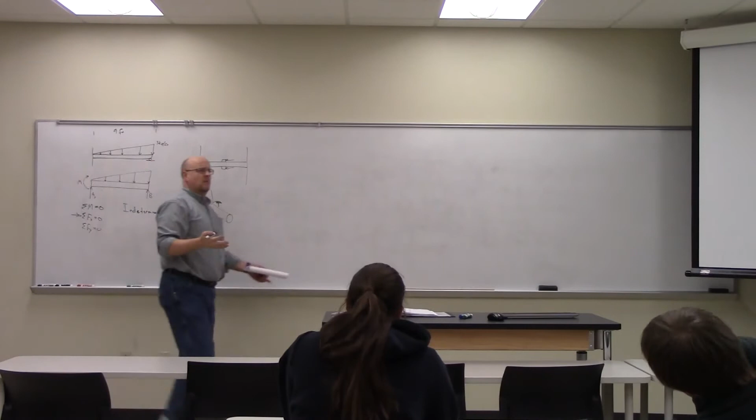Huh. I've never had that happen.

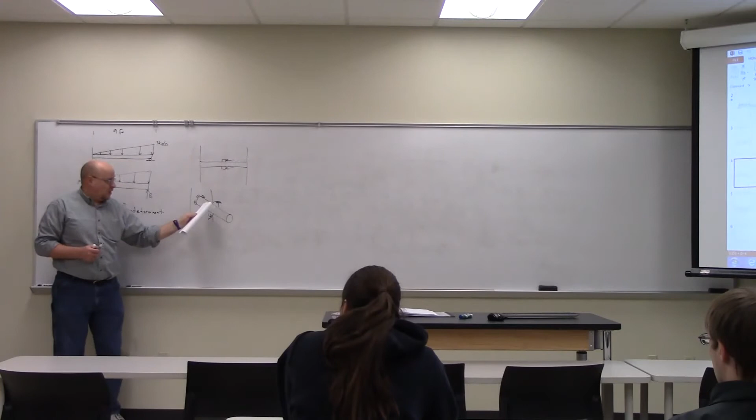And here we have an indeterminacy in bending. In each case, we use material properties. Here, we used the fact that the displacements at the ends were zero, so the total strain of this end relative to that end was zero. We added the strains. And here, we added the twists. We knew both ends were fixed, so the total twist was limited. We looked at the constraints of twist. Here, we're going to do the same thing, use the constraint to solve the problem.

Woo! Man, I was in the last... Okay.

So, what would our elastic curve look like for this? Parabolic? It would not be parabolic. What would it look like on the left end? Kind of slowly sinking? At the very left end, it would not be slowly sinking. Zero. Right, it'd be a slope of zero. So it has to come straight out at this end and then dip. Isn't the dip centered more towards the right side? Yeah. Maybe it is.

Now, we don't know necessarily where the dip is centered, but the left-hand end we know is straight. And the right-hand end we know has no deflection. So in this case, we now can't solve for Ay like we could last time. Last time we knew what Ay was.

Right? Because we knew it was the only reaction force that had to equal the total downward force. But now we have a distribution between AY and B. So now the moment at some point along here, so now we do a section analysis. We have AY pushing up here. Let's call it A. There's no X. We have A pushing up here. We have the ramp pushing down here.

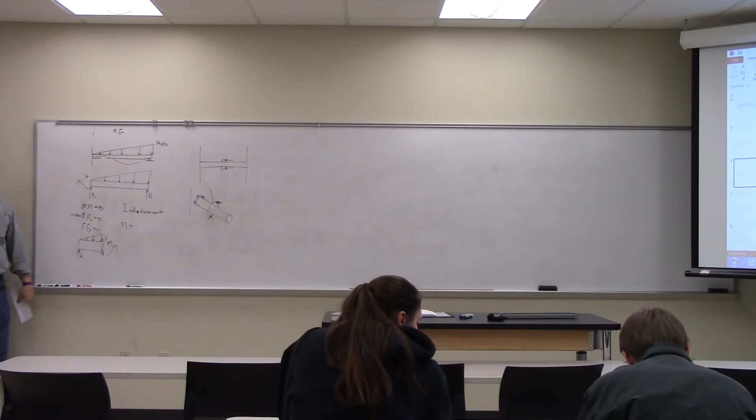So then we have V here and M here. Right? That's what we had. But now, instead of having a number for A, we have an unknown for A. So our moment expression, I think I got it from last time. What was our moment expression? Right, it was 3 over 9 times X times, give me the whole expression again. 13.5x minus x cubed over 81. That's supposed to be 18, I think, minus 81. Minus 81? Yep. And now instead of 13.5, we have AX, or A.

Right, the reaction force at A. So we have an additional unknown. Then we go through and we do the next step. So EI dV/dx, the integral of this, right? So we'd end up with AX squared over 2 minus x to the 4th over 72 minus 81x, right? Whereas last time we had 13.5 here, divided by 2, now we have A. You follow the process? And then we get to the other one.

What was our EIV? EIV was equal to, now it's going to be A over 6 x cubed, right? Minus x to the 5th over 360 minus 40.5 x squared plus C1 times x plus C2. There's our expression now. Okay. So now, all we've done is in order to remove our indeterminacy, we've incorporated one of our redundant unknowns into the expression.

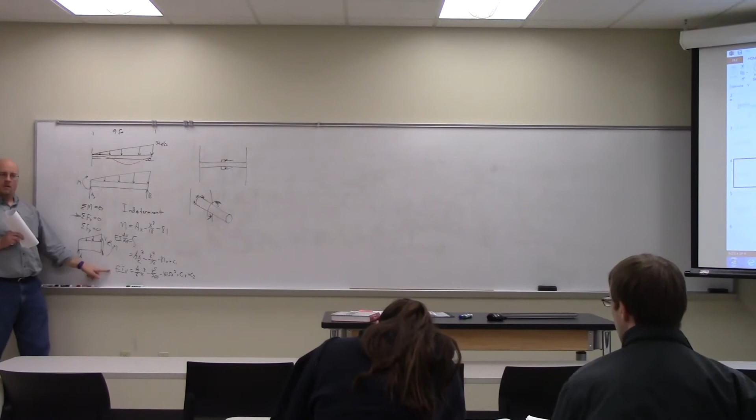But now we have to have a 3rd constraint. What's our 3rd constraint? v of x at x equals 9. It's the thing that we added that is our now redundant or indeterminate constraint. So by adding the indeterminate constraint out here, we've added another constraint in the equations: at x equals 9, v equals 0 as well. So I set this bottom equation equal to 0 at x equals 9, and then I can solve for A. So we use the same beam deflection process to also solve for indeterminacy.

And if we had an additional constraint, let's say I put another roller in the middle, I would now have an additional unknown, a C, pushing up here, but I would have an additional constraint to use to find this. Does that make sense? So we only have 2 equations? Yeah, I'd have these 2 equations, which would involve an A and a C, or actually by putting an additional constraint in the center, I would have to do an equation with an X coming in from this end, because I have to break the equation in the center. You know what I'm talking about?

So the point is, I would still end up with equations. I would still know my C1s and C2s from the other constraints, and then I would be able to solve for my A and C in this case. The more constraints I put in, the more complexity. But for every constraint I add, I get a constraint that helps me solve for yet another variable. Okay, does that make sense?

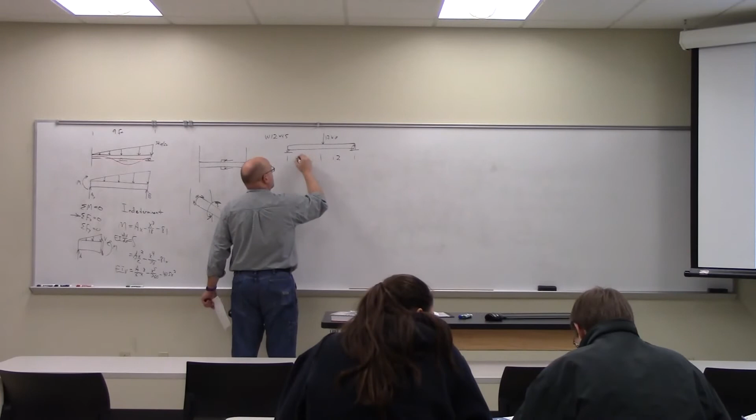And a W shape, pinned at one end and rolled at the other. We have a 12 kip load applied at the midpoint. And we have a moment externally applied here at the end of 50 kip feet. And these are A, B, and C. Okay. W12x45, made of A36 steel. Subjected to that loading, determine the deflection at its center C.

So what are we going to do? Free body diagram, all right, the free body diagram. 12 kips there. What else do we have? Reaction forces. A_y and B. We actually have the 50 kip feet out here. Okay? What do we do now? We can do our final reactions. Okay. So anyone find the reactions? You already know the reactions, right?

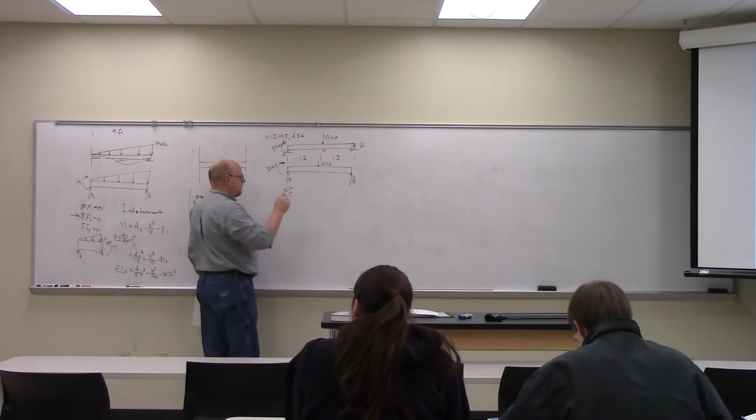Well, the force is applied in the middle, so we know that A and B are just both 6. No, there's an additional moment. If you were to do summation of forces in Y, you can do the moment, and I say we sum moments about B. Okay, so that doesn't get us A or B. Kayla suggested we do moments about A, and somebody over here suggested moments about B. I'm going to suggest we go with moments about A, just because the way it's drawn, it makes it a little more conceptually simple. Because then you don't have to add in the 50 kip moment. No, I still have to add in the 50 kip moment because it's an applied moment, no matter where it is. Oh, okay.

So, do we even need to do the reaction forces for this? Can we use appendix C? Okay. So, it's two different questions. First of all, do we need to do the reaction forces? Why would we not need to do the reaction forces? Well, if we are using appendix C. So you're both saying the same thing? Yes. So, we could indeed just go right to appendix C. Look at appendix C, because this is a simple beam, right? Simply supported beam.

That's the first one. So if you look down a simply supported beam, you have a variety of different loading configurations. Is this a loading configuration that's shown? Yeah. Which one? The very first one. No, it's not the first one. It's a combination. It's a combination of which two? First and the third one. It's a combination of the first and the third. See that? So in fact, we don't really have to go through the whole process, free body diagram and all that kind of stuff. We could skip to the end. Skip to the end.

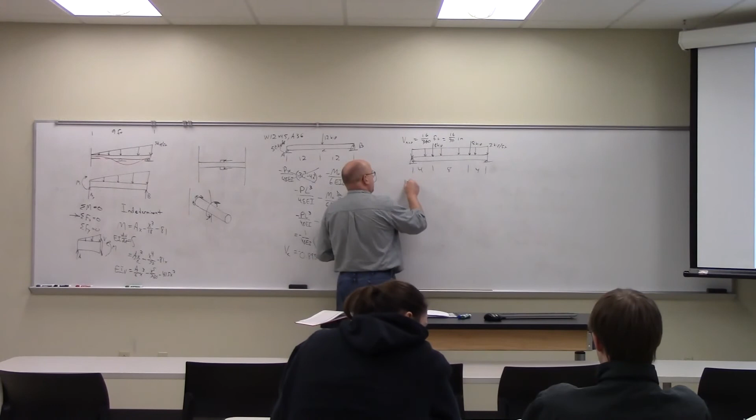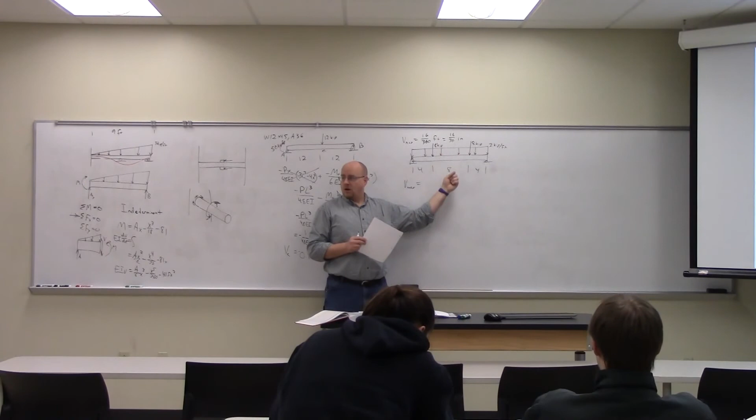V is going to be minus WX over 24 EI times quantity X cubed minus 2. Hold on. For the distributed loads, oh, V max. Okay, I'm sorry. Where's the maximum gonna occur for all of this? In the center, right? Because of the symmetrical loading of the 8 kip things, we are gonna end up with the Vmax being at the center. So we only need to concern ourselves with the center.

What's the center Vmax for the distributed load? Minus 5 W L to the fourth over 384 EI. Where W is 2, okay. What is the deflection caused by the individual loads? Negative P, okay, I guess we'll do the left one first. The negative P, where B is equal to 12 feet, times X over 6 EI.

Hold on a second, what did you say? It was 3B times A? Right, because B is 3L over 4, 12. A is L over 4. Oh, you're putting it in terms of the total length. Okay, and you'll see why I want to do that in a second. There's no A reference though. A, B, yeah. Oh, you're doing the elastic curve.

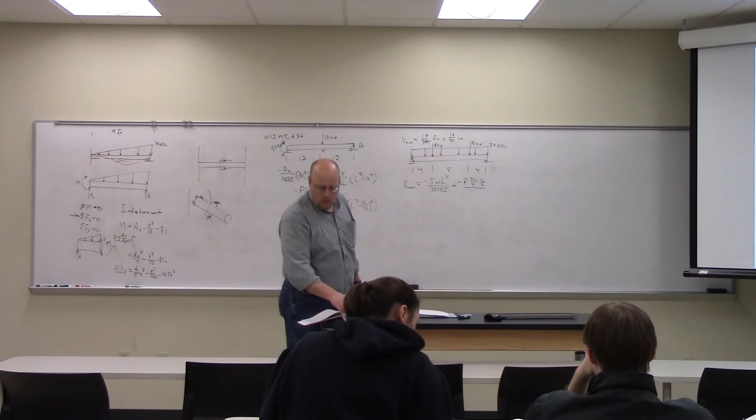Wait, you wanna do the deflection though? You wanna do this one, B and A. No, that's fine, he's doing the right thing. Okay, but I was just reading you the elastic curve for the other one, and it was the wrong thing. For which one? For the distributed load. Yeah, but it wasn't the wrong thing, but we know where the max is, we go right to the max.

But the max for this loading is going to occur here at X equals A. It is not going to occur back here at the center. So we can't use the max loading for that. Does that make sense? Yep. So what do I have? B times X, and X, where we're concerned, is L over 2. Divided by 6 EIL times the quantity L squared minus B squared, where B is L over 4, and minus X squared, where X is L over 2.

B actually has got to be L over 4. Right, because these are only valid between the end and the point of application. They're only valid for x's less than a. So is this one for the left one or the right one? This is for the right one. B is this piece. A is the piece over here. So we have to plug in L over 4 for B.

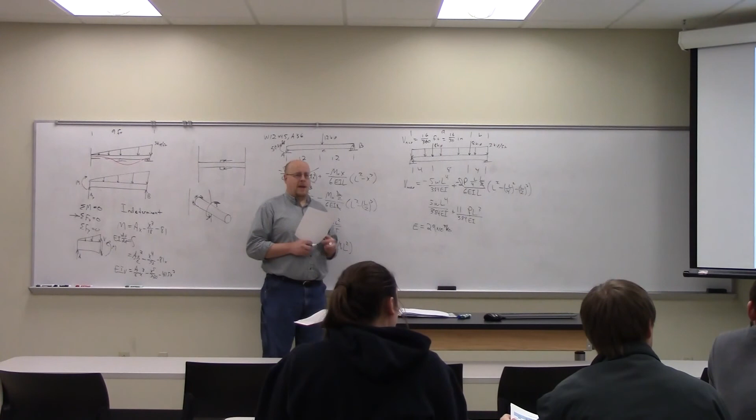So, if we find the maximum moment, we can find our S, and work backwards from the S. So how would we find the maximum moment? Take the second derivative of this expression with respect to, well, actually it wouldn't be this expression, it would have to be the actual elastic curve expression. So we wouldn't have wanted to equate to Vmax, just want to find the elastic curve.

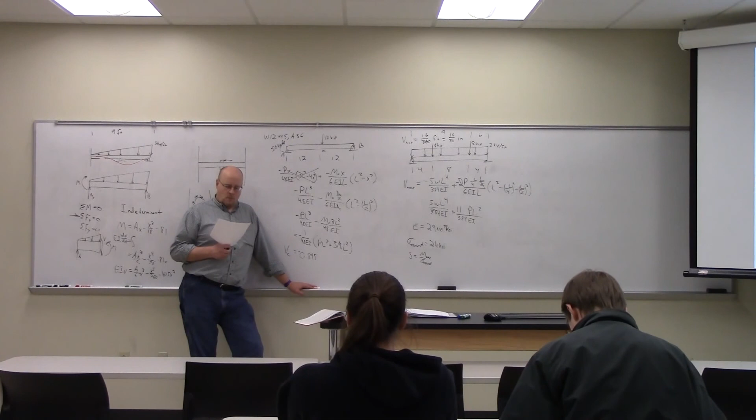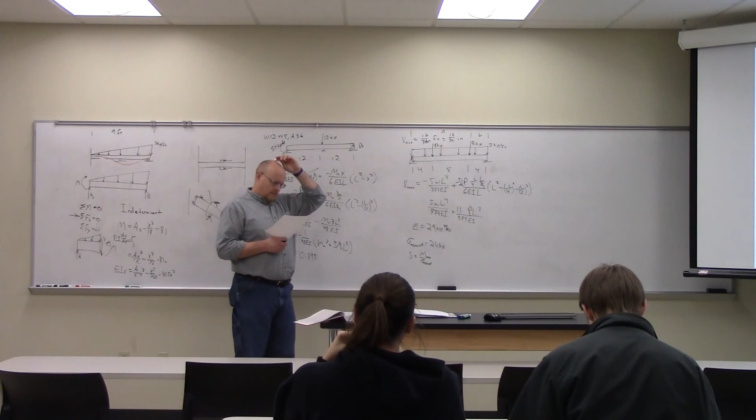Okay, so what's the difference between setting it equal to Vmax and solving for I, or finding X? Is one way harder? So, you have to meet both constraints. If we solve for a particular I this way, then make sure that that I also satisfies this condition, because that I would also have an S associated with it, and make sure that also meets this criteria. You have to meet both criteria.

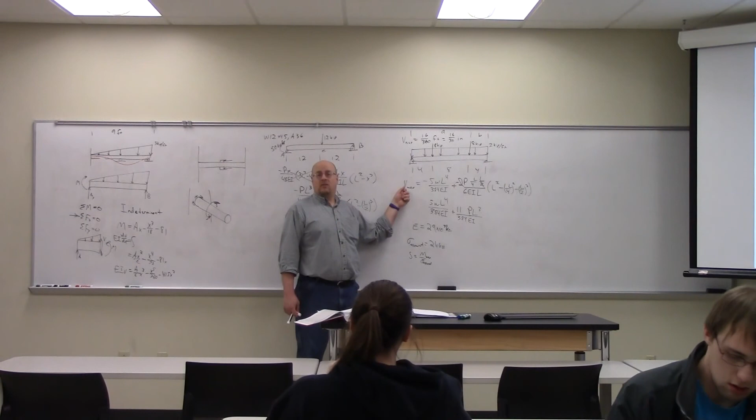So you take the derivative twice, it gives you the M. Or you can go back to the free-body diagram and do the M that way. But you still have X in the equation, if you take the derivative twice. Yeah, but again, if we do the free-body diagram, solve for M this way, we get an S. That S, we look up in the table, comes with an I. And then we use that I to make sure our Vmax is under half an inch.